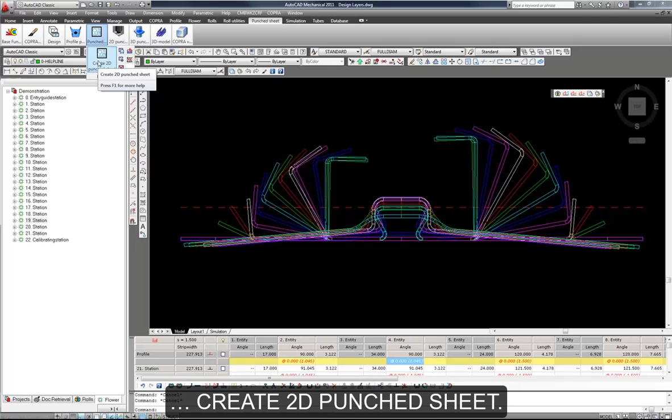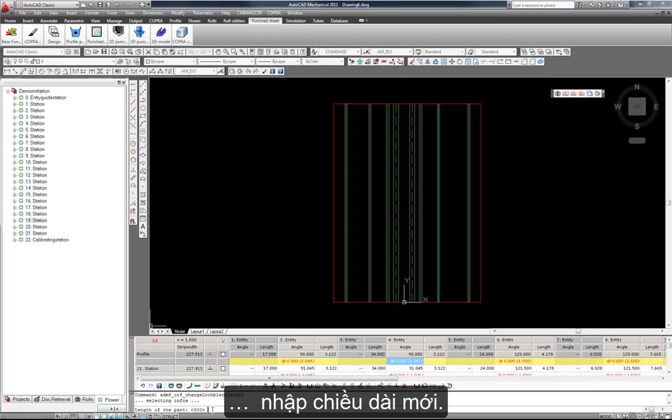A new drawing will then be loaded with our part length. You can see here the fold lines of our profile. We can now modify the length of this by going here and typing in the new part length. So let's change it to 400.

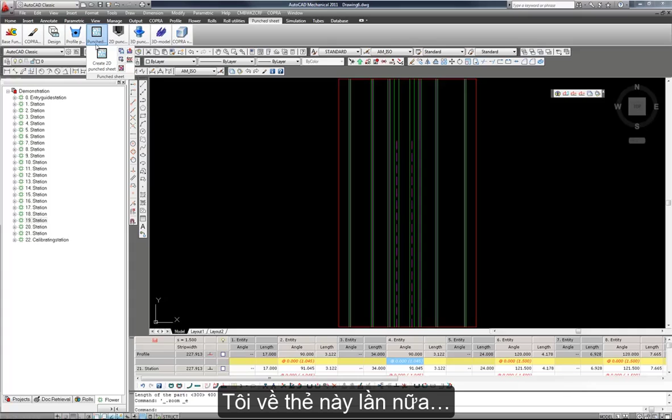We can of course then go again to the 2D punch sheet tab and save the punch sheet. This will now be updated.

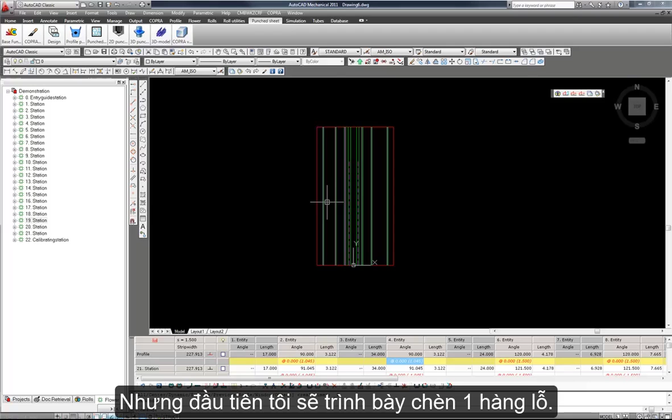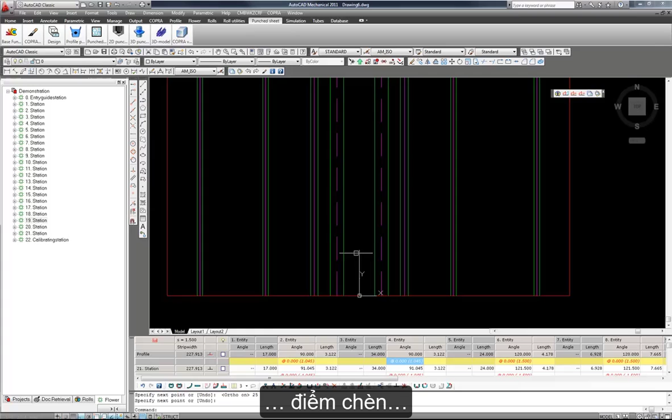Now first of all, I'm going to insert a row of holes. It's possible to insert individual ones, of course, but we will do a row first. So for this I'm going to draw an insertion point, and this will be the line from 0,0, and I'll make this 25 millimeters long. It is the end position of this line which will be the insertion point of my row of holes.

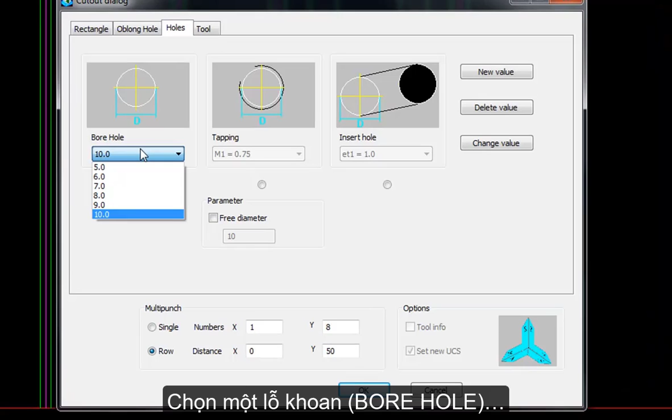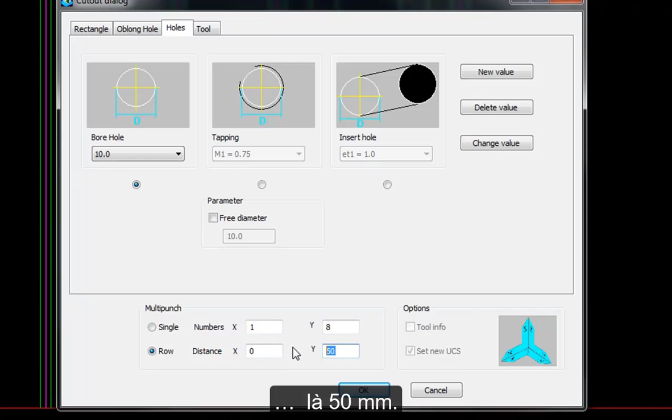Now I'm going to go to the 2D tool icon, which is on the 2D punched sheet tab. For this one I'm going to select a bore hole 10 millimeters in diameter and specify a row of holes. In the Y direction there will be 8 holes, and the distance between the holes in the Y direction will be 50 millimeters. In the X direction there will just be one row. Now hit OK.

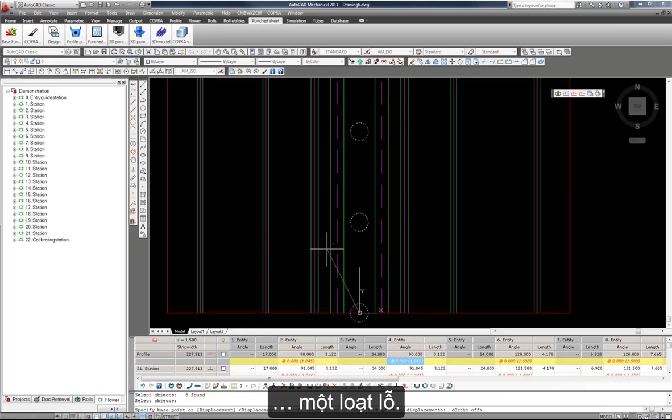You'll see then on the end of our crosshairs a series of holes are drawn. We can insert these at the end point of the line we drew. These will then be added to the flat pattern. Again, we should now go to the 2D punch sheet tab and save the changes.

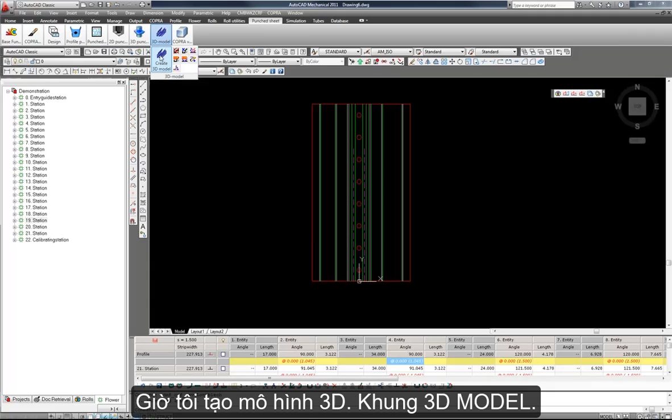Now we can create a 3D model of this, so we go to the 3D model panel. Not all holes and contours can be evaluated - this is no problem, COPRA is just detecting polylines which aren't a complete circle. Hit OK.

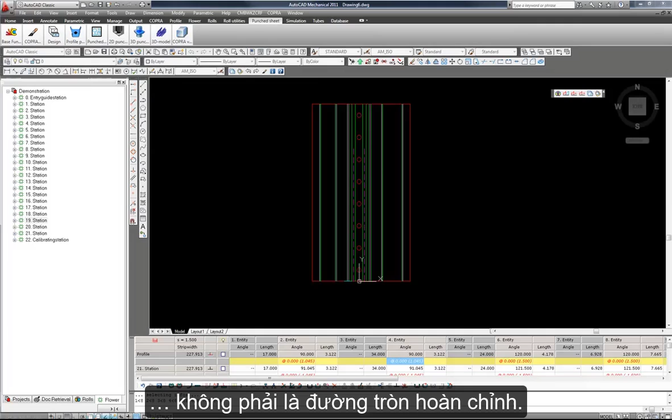Now you can see, if we look at some different COPRA views, by going 8 and enter, we can see the ISO view, our profile with a row of holes along the dovetail feature.

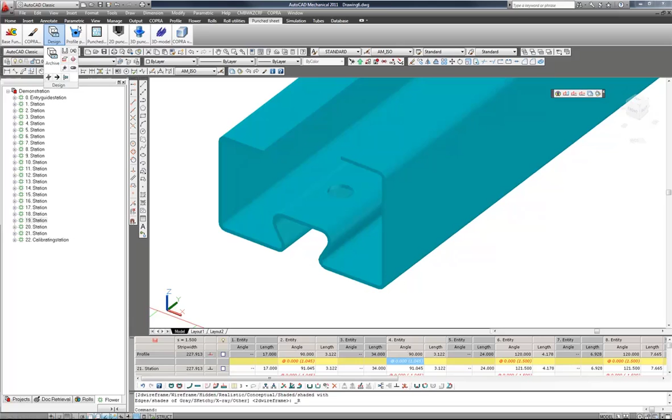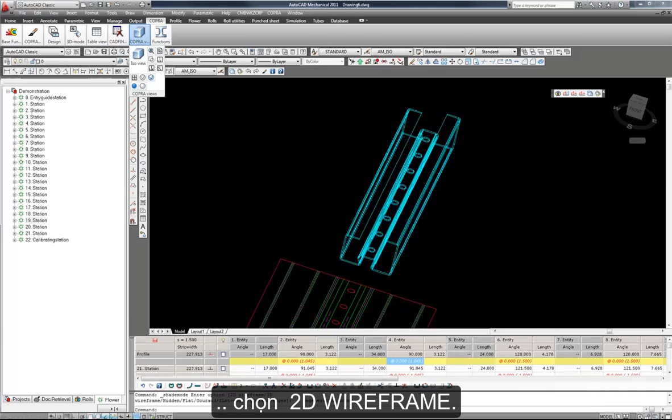I'm now going to return to the 2D wireframe view, again from COPRA views. Select the 2D wireframe and we can add some additional holes. Let's take a split screen of 3, and I'm going to maximize this view by highlighting the window and going to maximize view.

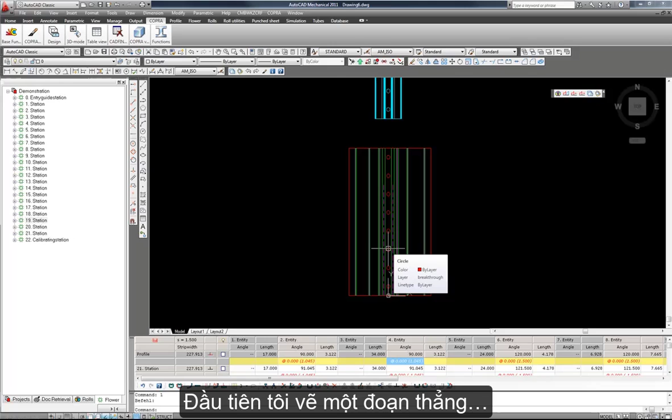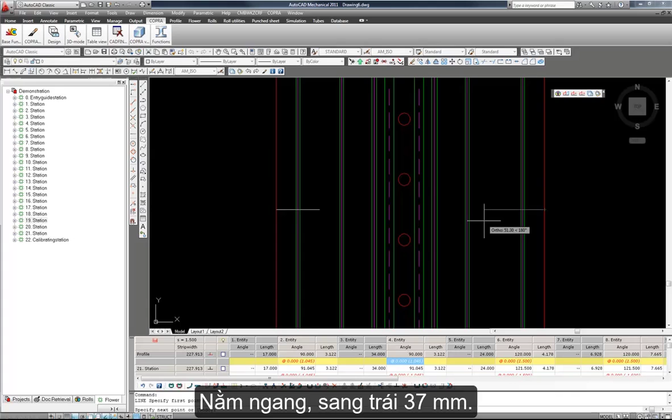Let us now add some additional construction lines and insert some individual holes. First, I'm going to draw a line on the left hand side from the midpoint of the overall length horizontally at 37 millimeters, and again on the right hand side 37 millimeters horizontally to the left. It's the end point of these lines which will be the insertion point for my slots.

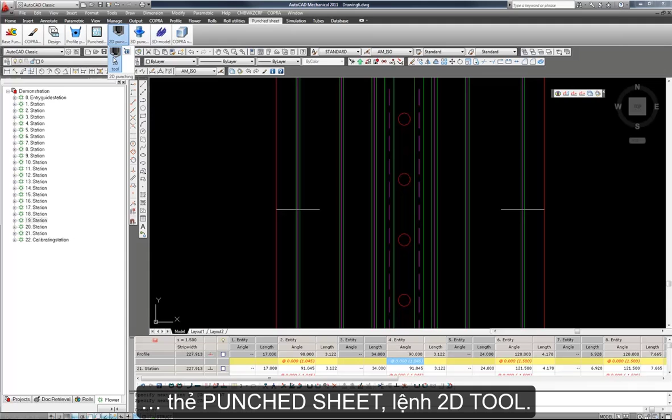So now, again, back to the punched sheet menu and go to 2D tool. This time I'm going to take a different shape from the library, and it will be an oblong hole. Here you can see we have possibilities for inserting the oblong hole: here the insertion point will be the quadrant of the arc, here the insertion point will be the centre of the circle, and here we will have the centre point of the oblong itself.

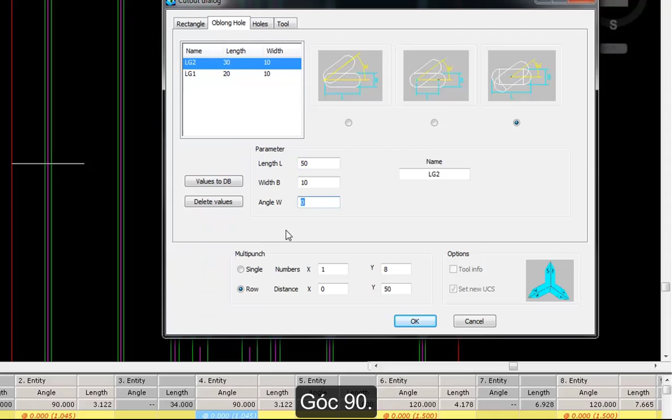Now I'm going to specify some parameters. The length here will be 50. The width can remain 10, but the angle here should be 90. This time I'm going to take the values to the database and give it a name - let's call it the 10 by 50 slot. So we can now use this one in the future should we wish.

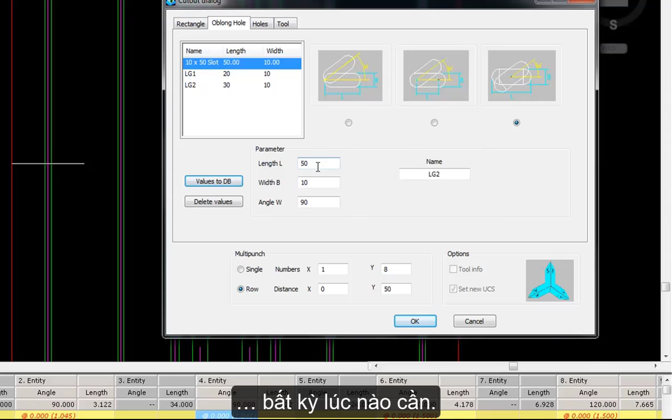And more importantly now, I'm going to select a single hole.

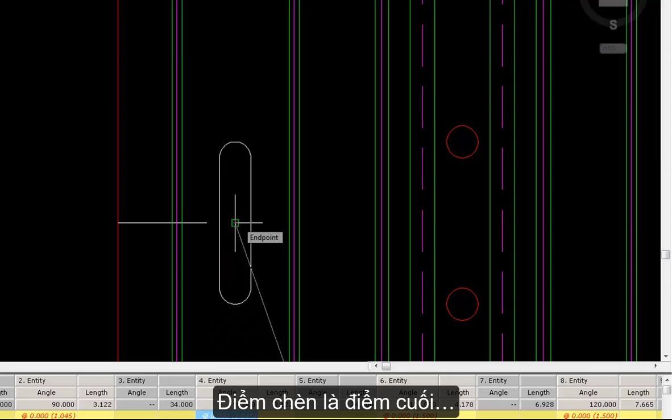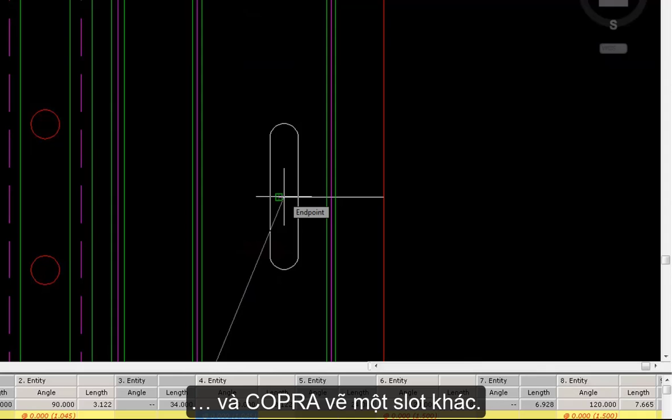Hit OK, and again on our crosshairs you can see a slot has been drawn with the parameters we specified, and the insertion point will be the end point of the drawn line. Now I want to repeat the command, so you can see yes is down here in brackets. I'll right click and COPRA will draw another for me, again at the end point of this line. This time I don't want any more, so I type N for no and enter.

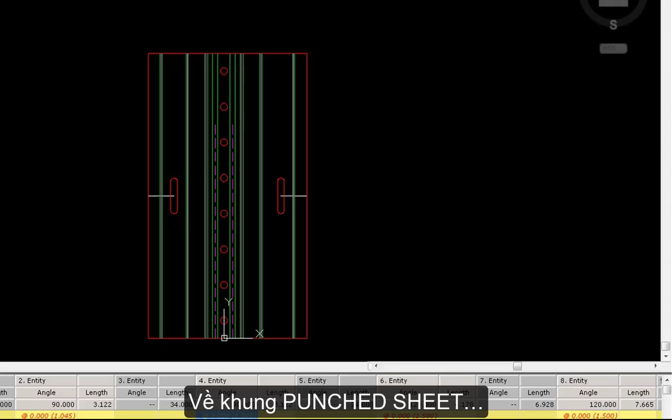As we've made some changes, I need to save the flat pattern again. So again to the punched sheet panel, and then here to save punched sheet. You can see the contour has now been highlighted. We can press OK. Again, not all hole contours could be evaluated, but this is no problem, and OK again.

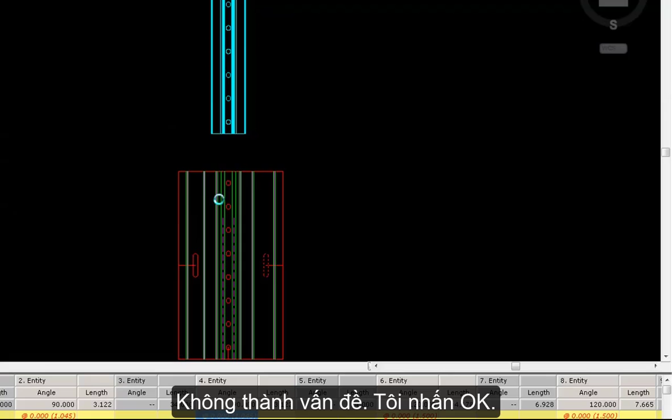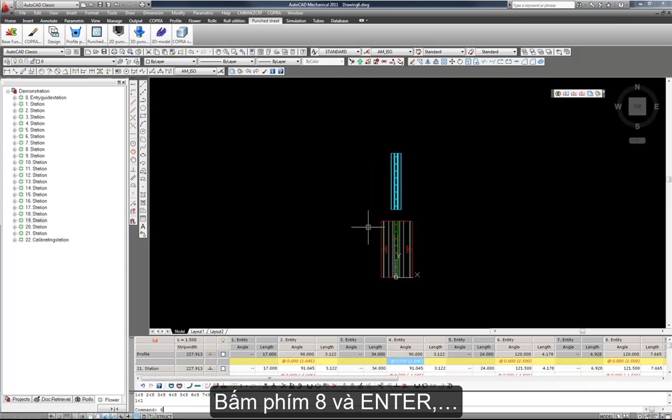We can now take a new look at the 3D model. We can delete the old one. And again, by hitting 8 and enter, we get an isometric view of our profile, and we can return to COPRA views and switch to the realistic view. We can see our 3D part drawn now with the additional slots.

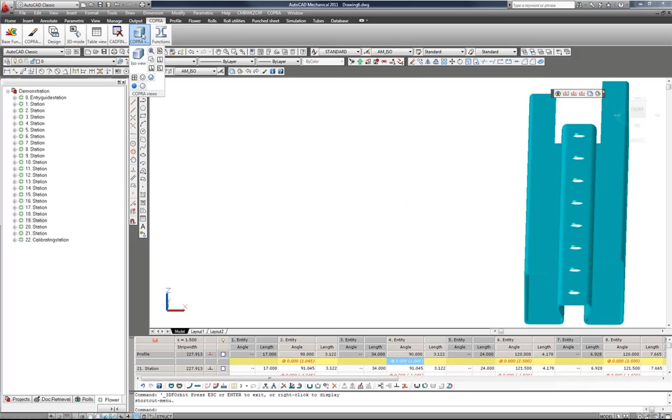Let us return to the 2D wireframe. Again, first type 3 and enter. We get 3 views, and I'm going to maximize the highlighted window by going here.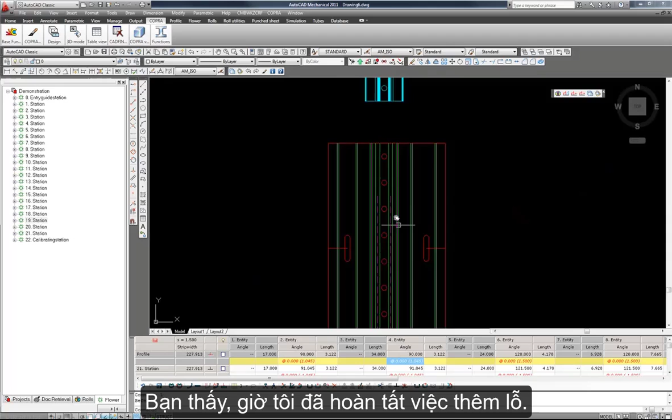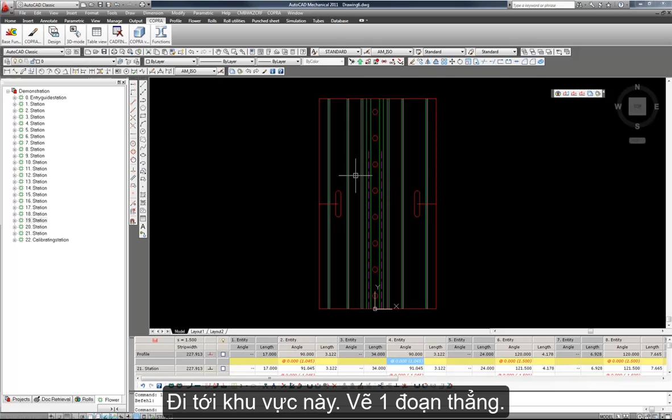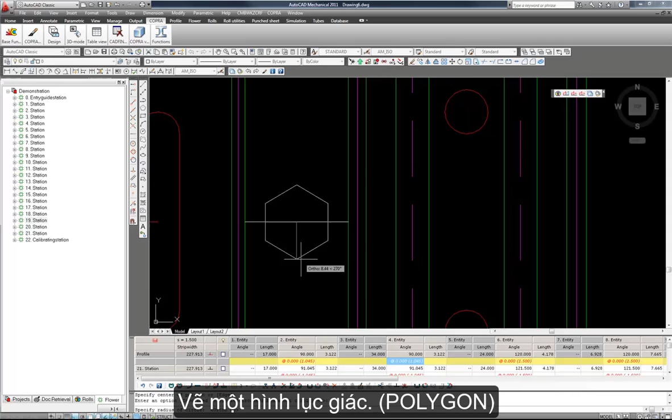So now we've added the holes, we have the possibility to draw some bespoke shapes. Let me just draw something, a simple shape, and we will add it to our library. Let us go to this area here, and I will draw a hexagon. So now we have an interesting bespoke shape.

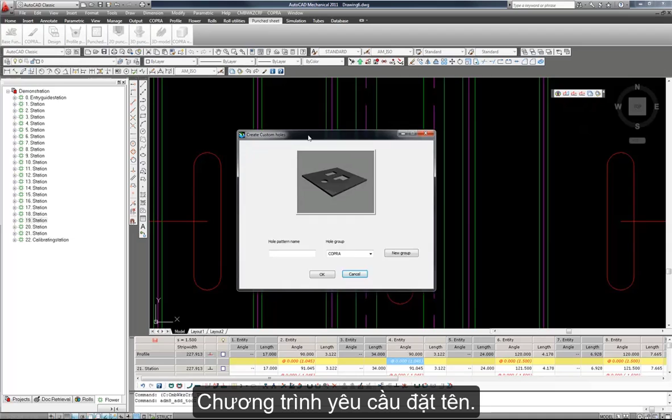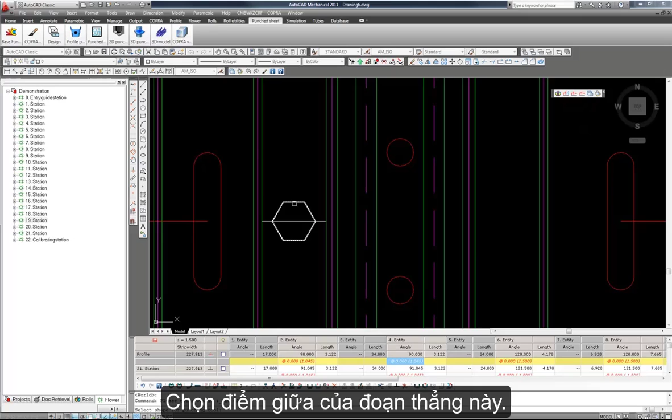We now return to the punched sheet panel, and this time we go to define tool contour. You'll see we're now asked to specify a name. The hole pattern name in this example will be hexagon. Hit OK, and now we're asked to enter the origin. This will be the midpoint here of this line and the shape for the punching tool. Select it and enter.

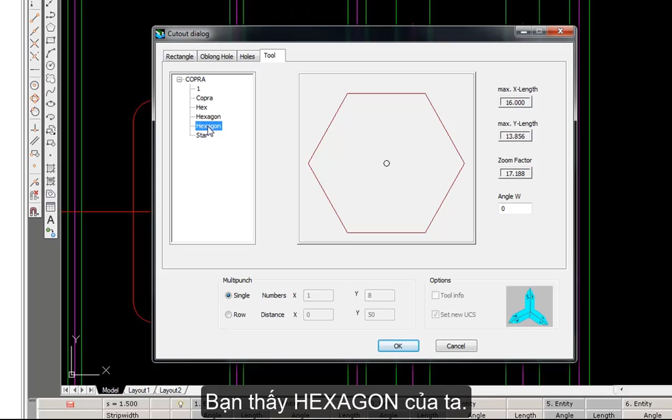Now when we return to the 2D tool, you'll see over here on tools, hexagon, this one is our orientation, is here. And of course, if we switch off ortho, we can insert this where we desire.

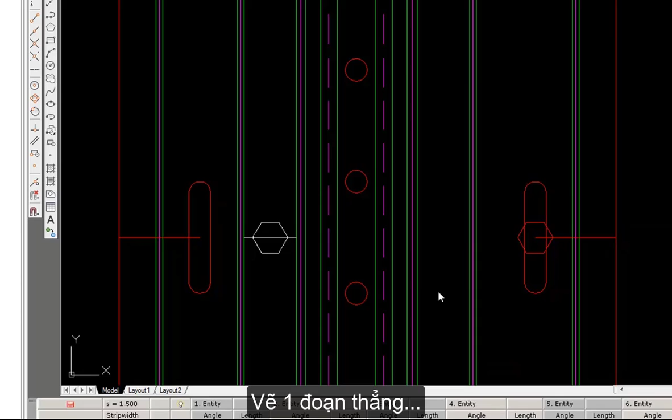I can naturally now move this into the correct position by just drawing a line from here to here and moving from the end point here to the midpoint here.

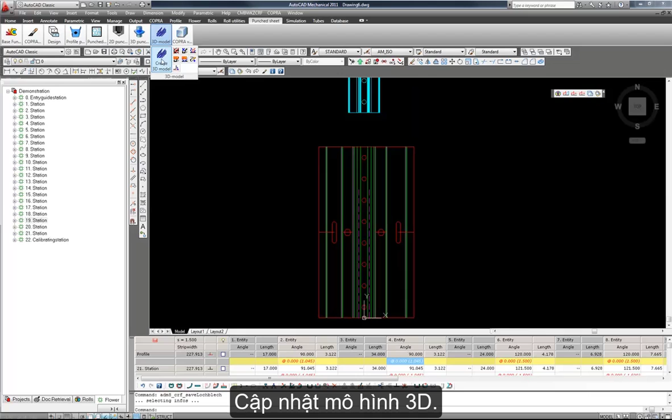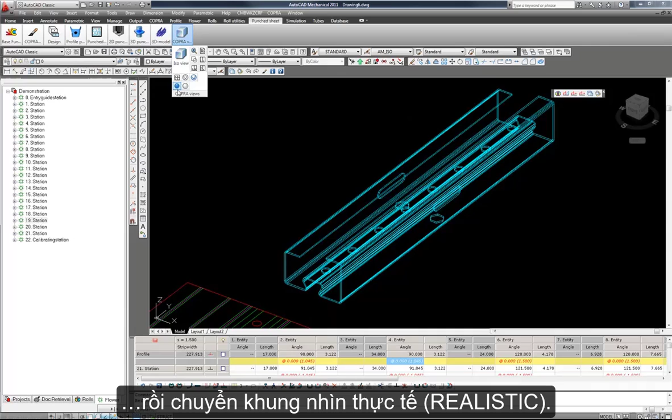Let us now save the flat pattern again. And of course, we can now update our 3D model. You can now see again by going to the ISO view, so doing 8 and enter, and switching on the realistic view, that our part detail has been updated.

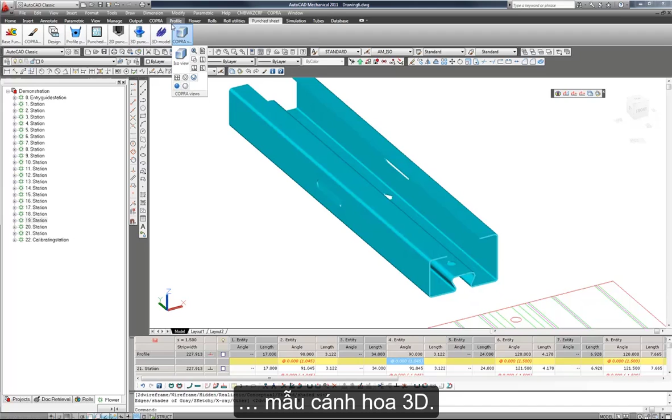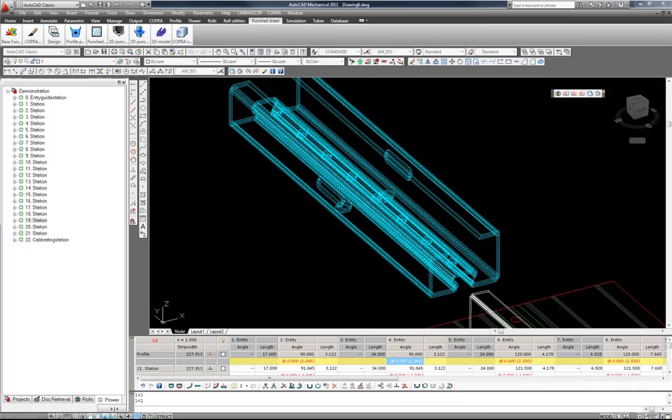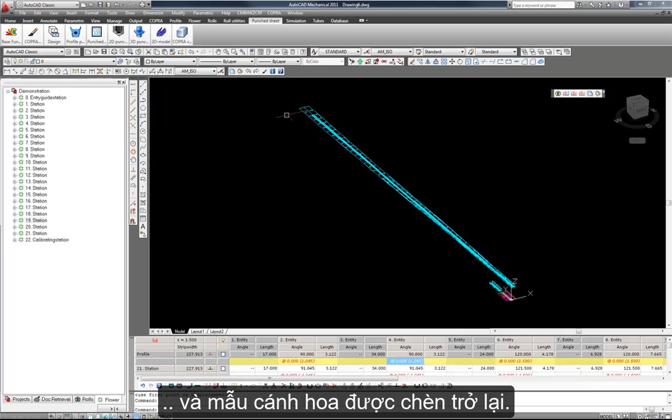We can also now create a 3D flower. I'll switch back to the wireframe to do this, and then we go here to 3D model and 3D flower. Let's give COPRA a few seconds to draw this. Then you can see here on my crosshairs I can pick a position and the flower will be inserted. Again, now returning to realistic view, I can now browse through the forming stages.

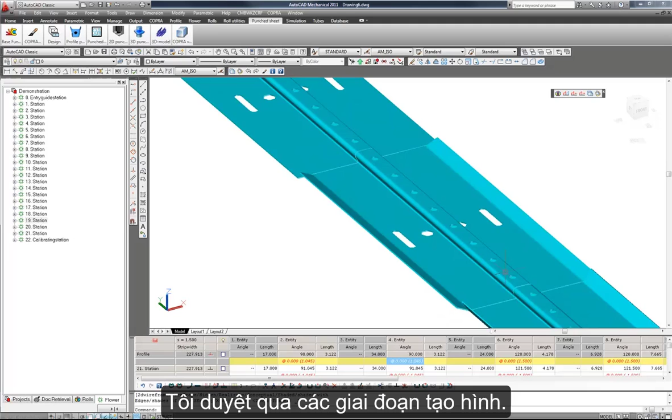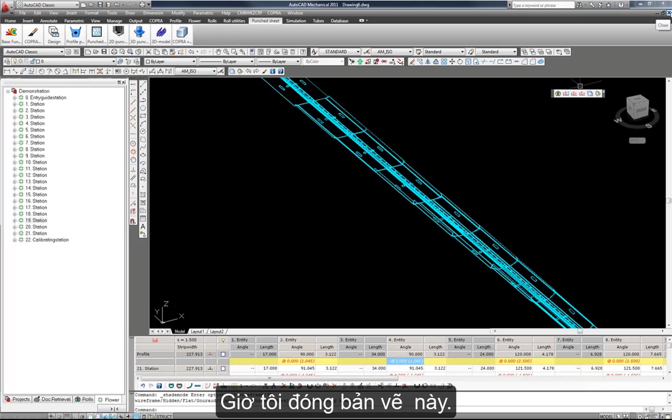So now we've saved the holes, we can return to COPRA to see areas we should avoid for our roll design, in other words to give clearance to ensure we don't deform these holes. So now I'll close this drawing file. Of course it's possible to save it, but we don't need to save the changes because we did this already, and here we don't need to save the drawing.

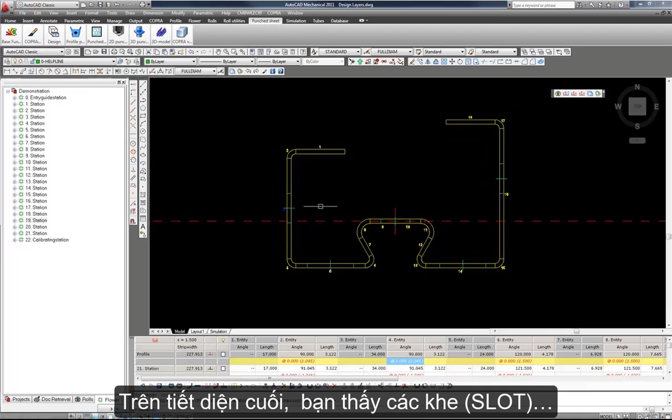So now if I go to COPRA Redraw, and here on the final profile, you can see the slots over here in element 3 on the left hand side, the slot over here in element 16 on the right hand side, our new hexagonal shape which we took from the library here in element 14 and 5, and our row of holes here on element 9 and 10. So these are the areas when we're designing the roll tools that we should ensure we don't give compression, as this could deform our slots and holes accordingly.

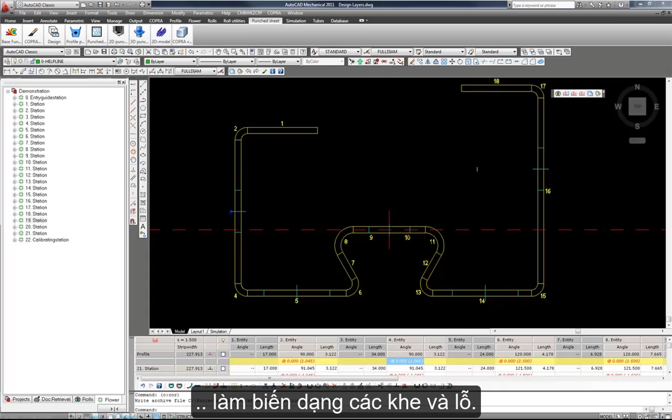We'll now move on to do some roll design.